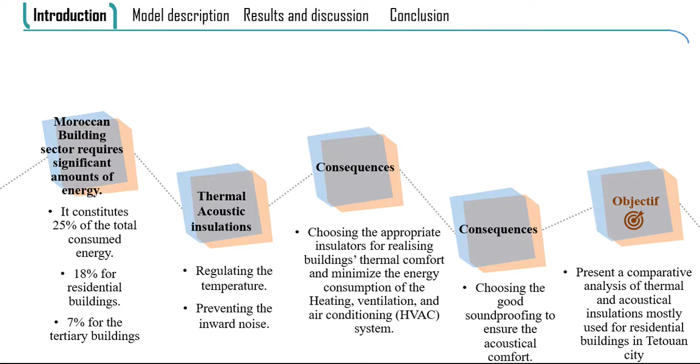Consequently, that will help the scientists and engineers to choose the appropriate insulators for realizing buildings' thermal comfort and minimize the energy consumption of HVAC, and to choose a good soundproofing to ensure a performant acoustical comfort. The objective of this work is to present a comparative analysis of thermal and acoustical insulations mostly used for residential buildings in Tétouan city.

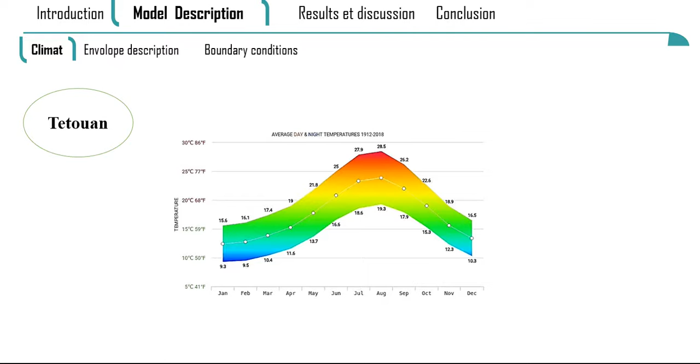For the model description, the following figure presents the average monthly temperatures in Tétouan city, which is located in the north of Morocco and characterized by a Mediterranean climate. The yearly average temperature is 18.7 degrees Celsius, and the average precipitation is 600.7 millimeters. Moreover, the presented work is focused on the stationary regime during the summer season, specifically on the 7th of August 2019 at 2 p.m.

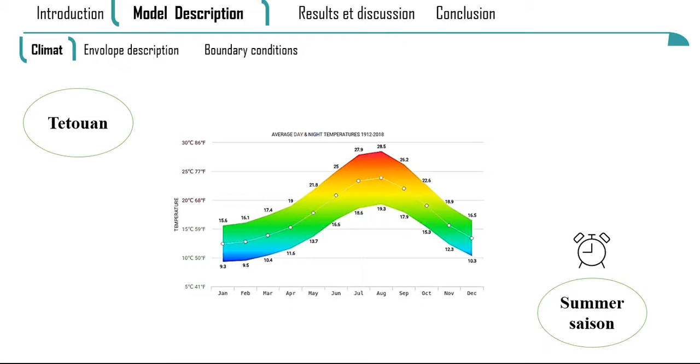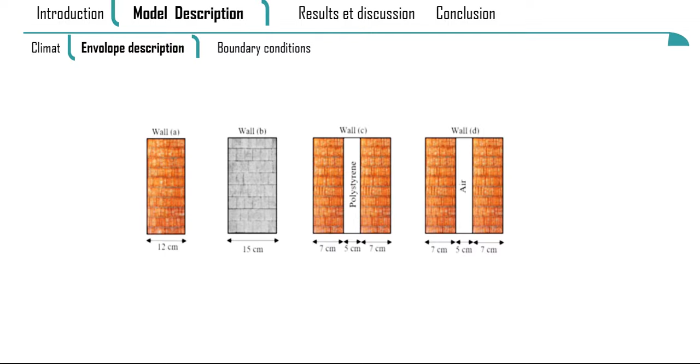This figure presents the four residential building envelopes mostly used in Tétouan city. Wall A presents a single layer of hollow clay brick wall. Wall B presents a single layer of concrete brick wall. Wall C presents double layers of hollow clay brick wall with a medium of polystyrene, and wall D presents double layers of hollow clay brick wall with a medium of air.

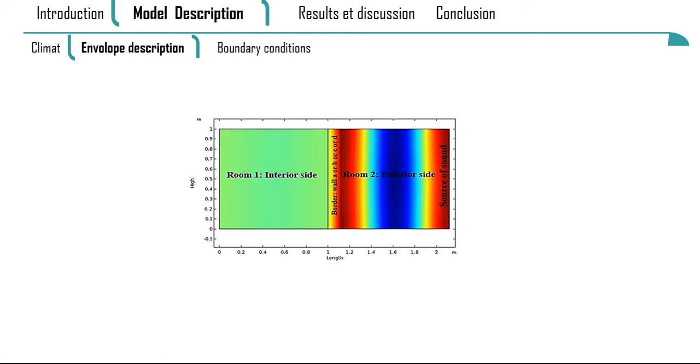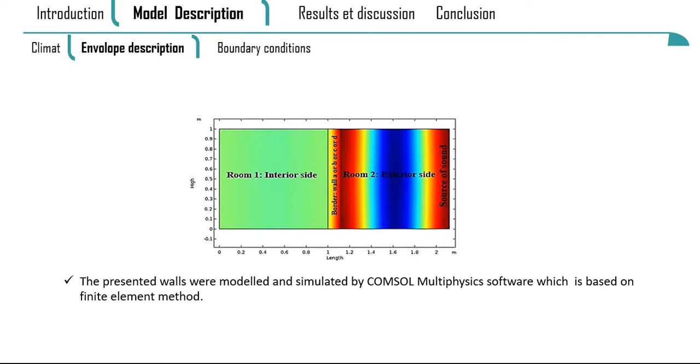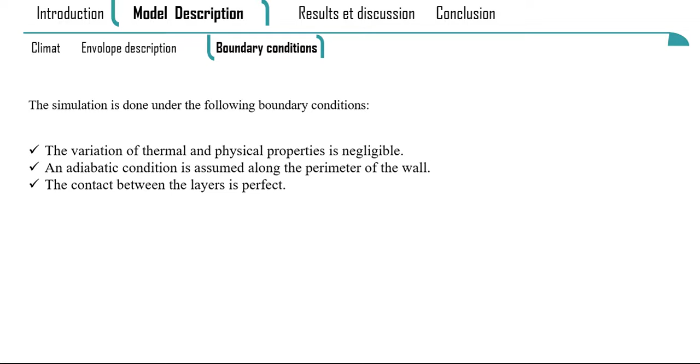The presented walls were modeled and simulated by COMSOL Multiphysics software, which is based on the finite element method. For the boundary conditions, the simulation is done under the following ones. First, the variation of the thermal and physical properties is negligible, an adiabatic condition is assumed along the perimeter of the wall, and finally, the contact between the layers is considered to be perfect.

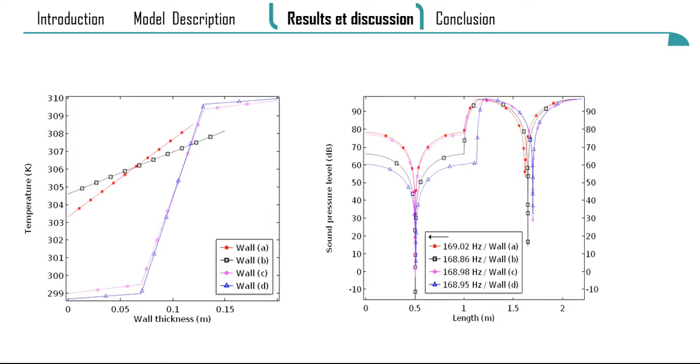Finally, as a result, we deduce that homogeneous and thick walls such as walls B and D have proved a good ability to reduce noise transmission in comparison with walls A and C, but their acoustical insulation performances are still not good enough. For the correlation, we have observed that despite the performant thermal insulation of certain building envelopes, their acoustic insulation performances could be very weak, which could negatively influence the acoustic comfort of inhabitants.

For the energy efficiency, choosing efficient thermal and acoustic insulators is still important to ensure good thermal and acoustic comfort for inhabitants, but the correlation between these two characteristics is still quite difficult, while finding correlated models for homogeneous and thick walls of similar structure is possible, and that also helps us to reduce the energy consumption in residential buildings.